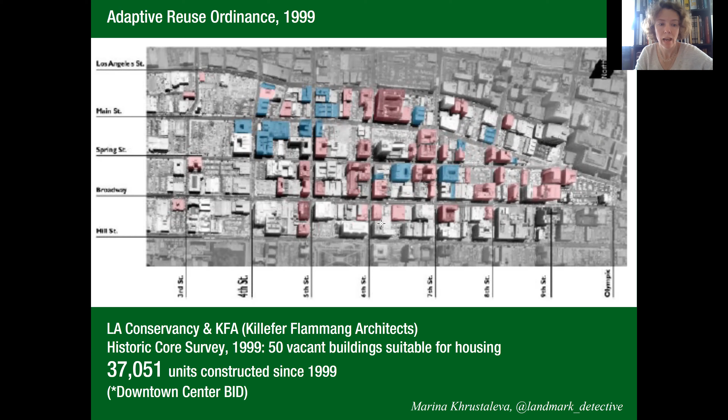In 2003, five other areas were added to downtown LA to be covered by the adaptive reuse ordinance: Chinatown, Lincoln Heights, certain parts of Hollywood, Wilshire Center and Koreatown, and some portions of the Central Avenue development area.

However, now we can see that some of them don't take on any new adaptive reuse projects at all. Some of them have switched their attention to new construction. In a minute, I'll try to explain why this is happening.

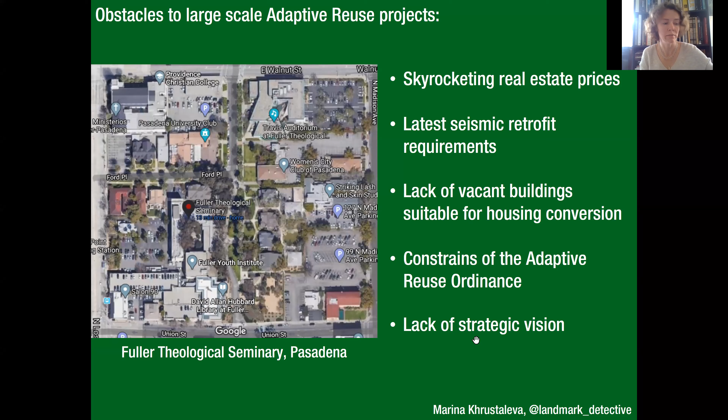But this is just an example that when there is something on a large scale, there are so many stakeholders who have to get to a common decision that sometimes it's just not an easy process. With that in mind, I want to invite Margarita Jerabek to start our first presentation on the Culver Studios project in Culver City.

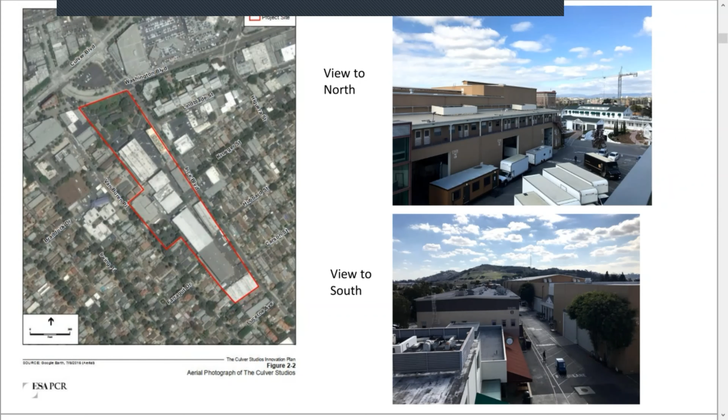So we did a chronology of the buildings built during this era. There are 4 buildings that remain, and the rest are gone. One of the 4 buildings has been relocated.

This is the DeMille era, Cecil DeMille and the early RKO studios, when the Culver Studios became part of the Big 8 motion picture studios, which I'll talk about in a minute. This is what it looked like in 1931. In particular, the glass stages are now being replaced by sound stages—sound stage 2, 3, 4, and building O. It looks like there are still 2 glass stages remaining, so we're starting to replace the glass stages with sound stages during this period.

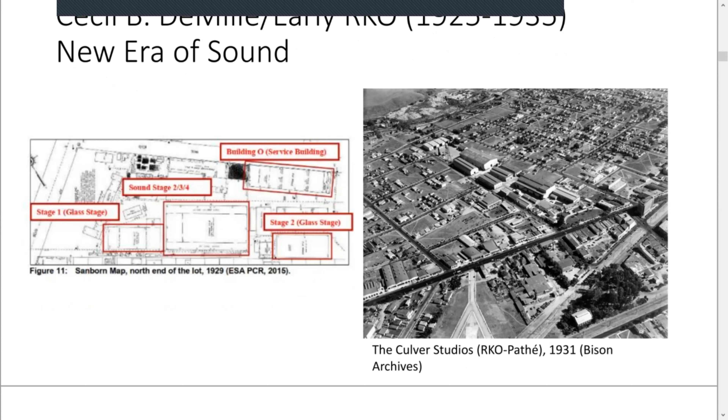This shows from the RKO era, 1925 to 1935, which buildings are extant. Most of the historic buildings preserved today were built during this era, and there are other buildings that have since been removed.

Then there's the Selznick era, 1935 to 1949. During this period there wasn't a lot of construction or site development compared to the earlier periods. This is when the big productions came to Culver Studios—Gone with the Wind, Citizen Kane, The Paradine Case. It was historically significant during this period, but pretty much the historic buildings that contribute to the history of the studio site today had already been built, with the exception of Soundstage 15 and 16, which was added down near the end of the lot.

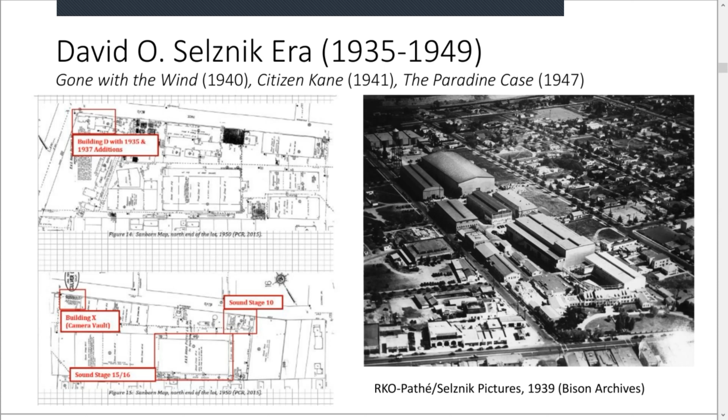And then there were additions to the mansion—this wing with building D—and a DeMille theater that was added during the DeMille period, right here alongside building D. So again, here you can see which buildings are extant from this period and which are no longer extant. A lot of site development happened over the years.

So the site was evaluated under the context of major motion picture studio, where we studied through comparison of the various major motion picture studios in LA and looking at Sanborn maps what buildings comprised a major motion picture studio, and identified 12 building types associated with the studio as a property type. Today, there are 5 of the 12 building types existing on the Culver Studios lot. The site is currently dominated by sound stages and the mansion building.

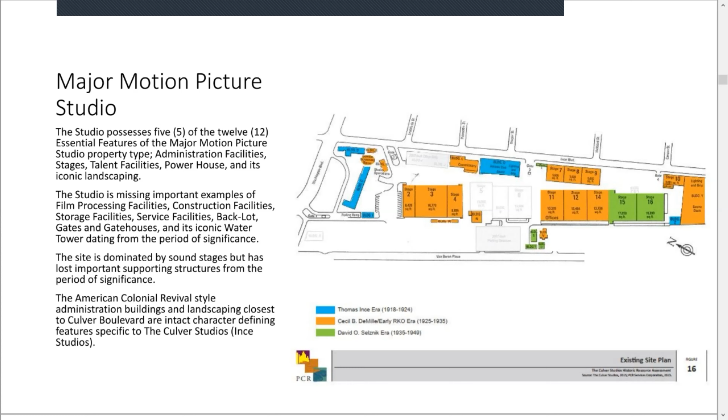The mansion building and associated ancillary structures are colonial revival in style, and there's an intact landscape there. But the other buildings that formerly filled out the site have been demolished and replaced over the years.

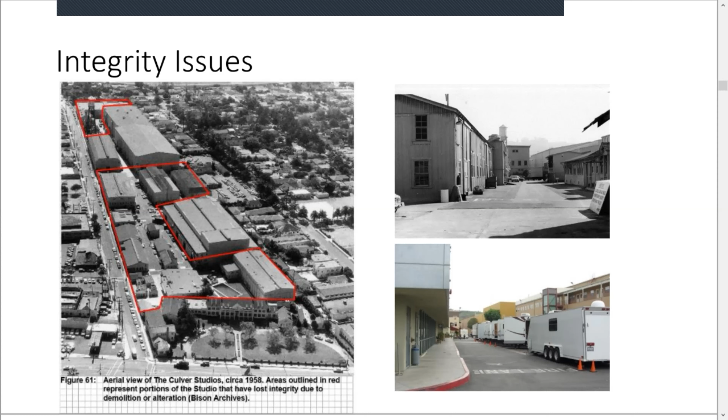So here there were obviously some integrity issues we identified on the site. These areas outlined in red are the areas where buildings from the period of significance have all been demolished or substantially altered and are no longer contributing. Above here is a shot of the studio lot during the period of significance, and below is a shot of the studio during the time of the survey.

So we conducted the historic assessment. We identified and evaluated the property under the major motion picture studio context, and also within the city of Culver City, the studio was found significant for the early development of the city, the early economic development of the city, and for the theme Heart of Screenland. In terms of the 5 building types, there are administration facilities, sound stages, talent facilities which are the bungalows, a power house, and landscaping and circulation.

The 40-acre back lot was sold off, unfortunately, and is no longer there. And these other building types are no longer on the site.

So it was identified eligible under criterion A1A, National Register Criterion A, California Register Criterion 1, for association with the Big 8 motion picture studios. It was eligible under criterion 2 for significance in the evolving film industry and economic development of the city. The period of significance is 1918 to 1956.

It's also eligible under criterion B, National Register Criterion B, and State Register Criterion 2 for its association with significant personages, Thomas Ince, Cecil DeMille, and David Selznick. It's also, unfortunately, found ineligible for architecture under C3 because of the lack of integrity as an example of the major motion picture studio, due to the lack of the necessary property types.

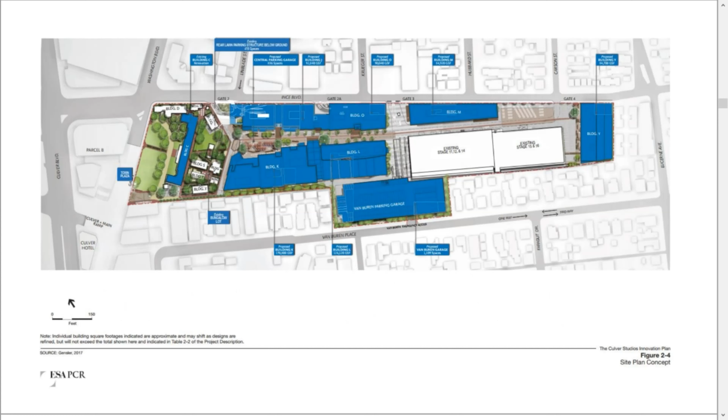Next slide. So here's a view of the innovation plan.

So mitigation measures, let's see, did I already show that or not? Go to the next slide. In terms of impacts and mitigation, significant unavoidable impact: first, the demolition of stages 2, 3, and 4, and relocation of bungalows. Less than significant with mitigation: potential impacts for accessibility, structural, and security upgrades to the historic buildings. So how do we handle this?

We recorded, salvaged, and are interpreting stages 2, 3, and 4, where we recorded the bungalows prior to relocation, and there's going to be an interpretive plaque at the new site. We prepared a relocation and rehabilitation plan for the bungalows' relocation, and conducted monitoring during the relocation. The mansion landscape is being rehabilitated in conformance with the standards, and plan reviews and monitoring are being conducted.

All of the tenant improvements and seismic, ADA, and security upgrades are being conducted in conformance with the standards. For the campus as a whole, there's a long-term preservation plan, not only short but long-term, for the future preservation of the studio, and also a state-of-the-art interpretive program.

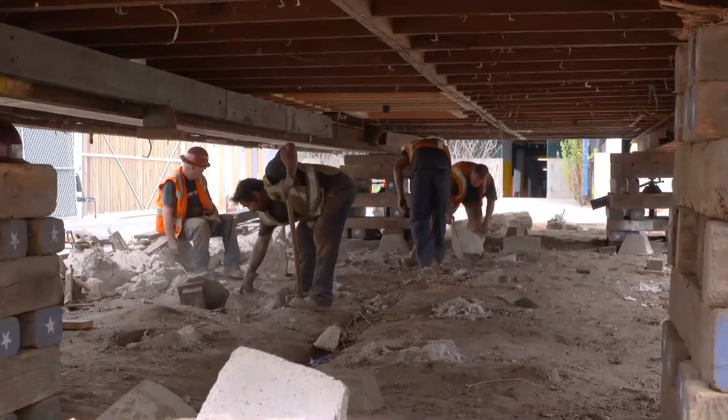So what we had to do is take off all of the structures that stick out of these buildings, because they're going to have to squeeze down this narrow little street. Porches had to come off, air conditioners came off of roofs, strip them down bare, cut out all the utilities, and there was a mess of pipes and conduits and all sorts of stuff going underneath these buildings.

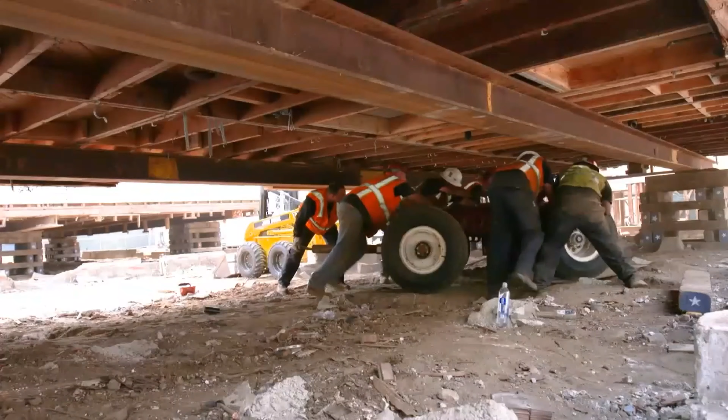Disconnect them, basically. They slide these giant steel beams underneath them, put dollies underneath the steel beams, and slowly pull them and roll them down the streets. It's pretty amazing, but they squeezed them through this narrow little area, and there were inches to go when they were doing it.

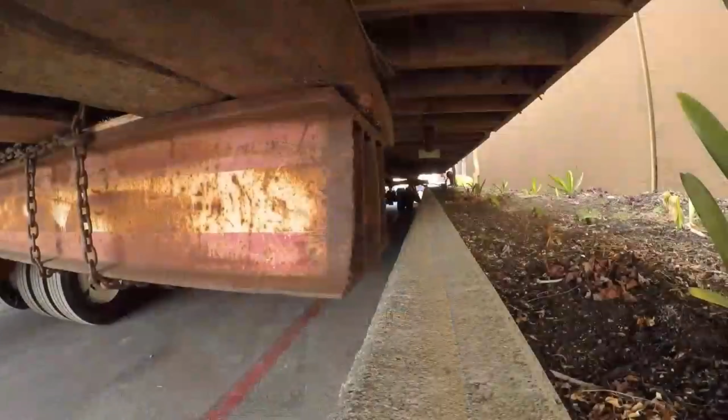At one point, they were kind of hitting, and like I said, there's no dry run for this, you just kind of go for it. They're bringing the building up, and it's not quite clearing a concrete planter bed, so they have to jack the building up a few more inches in one direction so they can clear it and squeeze it down. These guys are great.

These are the same guys that moved the space shuttle. They said they moved a 50-foot concrete building in Pasadena.

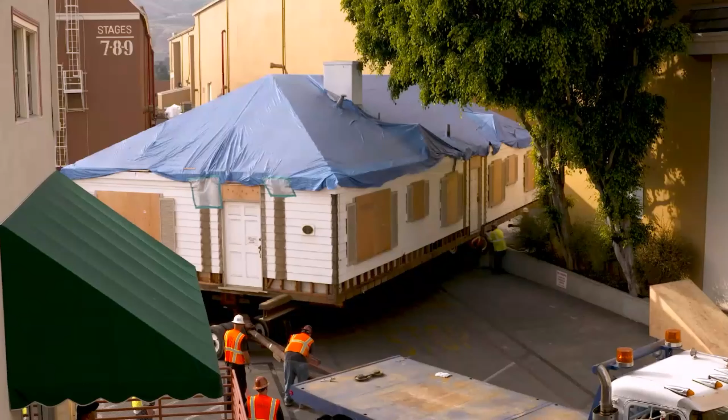So, to them, this was kind of child's play and pretty simple. These particular buildings have been associated with Culver Studios since the 20s and 30s, so their association is almost 100 years old. They're really important in maintaining the historic significance of Culver Studios.

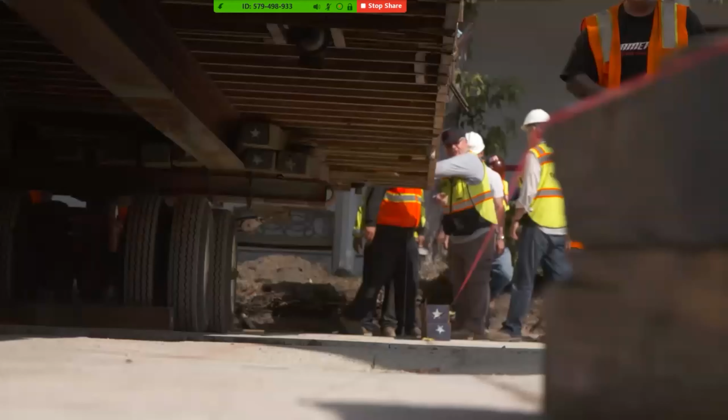We couldn't have picked a more difficult relocation project, because we're relocating the bungalows to the top of the parking structure. The weight of the bungalows combined with the rigging required to move them is too much for the parking structure. We have to be very precise and think everything through carefully. We can't just move them, build a new foundation, and hook the buildings up again. Drainage is an issue, everything is an issue. It's a very intricate project.

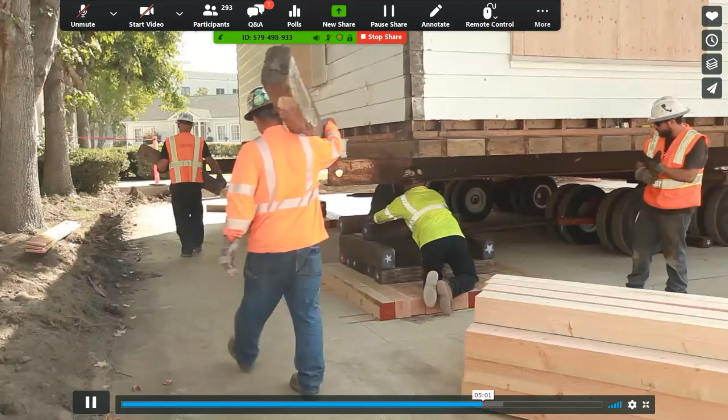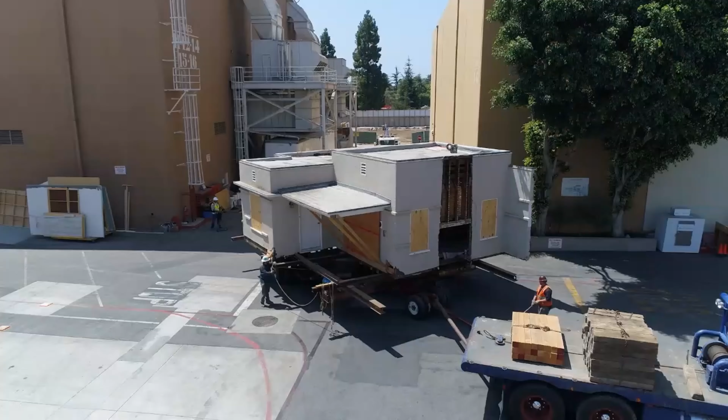There were a lot of unknowns. We had to get the right team in place to find out what they were and give us enough time to make this happen. We've got the best team we can, but no one here has ever done this in its entirety. Everybody has done a piece of it, but no one has ever put buildings on top of a parking structure before. We've hired a specialist crew that braced and secured the building to make sure that during the move it stays within its original parameters and doesn't shift around. We've removed elements from the building that would be problematic to travel with—a couple of things made the buildings too wide, so we had to remove them to fit through the access we had.

I really appreciate and respect the time and energy going into doing the job right and caring about the history, realizing it's a win-win situation for the studios and for the benefit of the public as well. We recognized when we bought it how unique the property was, both within the community and the city at large. We felt we needed to be a really good steward, and to do that it was important to preserve this as some form of content-driving facility. It's just such a cool property. At the end, it'll look great and look simple, but all the hard work that went into it is quite remarkable.

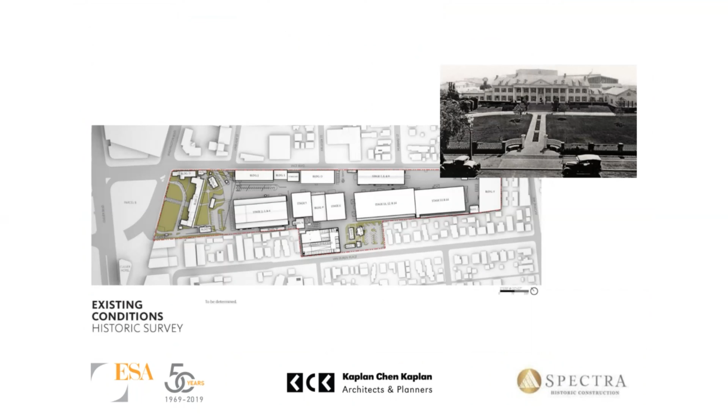And there you see circled is where the bungalows were relocated, as Margarita pointed out, the site plan. And of course, there it is. And just like you expect out of the entertainment industry, that green grass was misleading.

As soon as we started writing memos to the team about issues we'd been encountering, they informed us a lot. The site itself was part of a larger project, and there were activities going on all at the same time. It's an active studio lot.

The site turns out to be located over subterranean parking. There were issues about the soils. I'm advancing it without meaning to here. There were relocation issues, as the movie pointed out.

In the setting, we had to recreate a setting on an area where the landscape couldn't be as mature, but was starting over again. But we wanted to use the paths and paving.

The schedule is a big part of it, as they pointed out, because once Amazon wanted to occupy the site. So after one of the first tasks we did, sorry for skipping through all this, the use became extensive, much more activity.

There's huge mechanical and data that had to be included. The code, of course, was very important. Margarita pointed out the Secretary of Interior Standards, the State Historic Building Code we use.

There are all sorts of accessibility handrails off those bungalow steps, door heights, widths, hardware. The house had residential bathrooms that weren't handicap accessible, fire life safety, sprinklers.

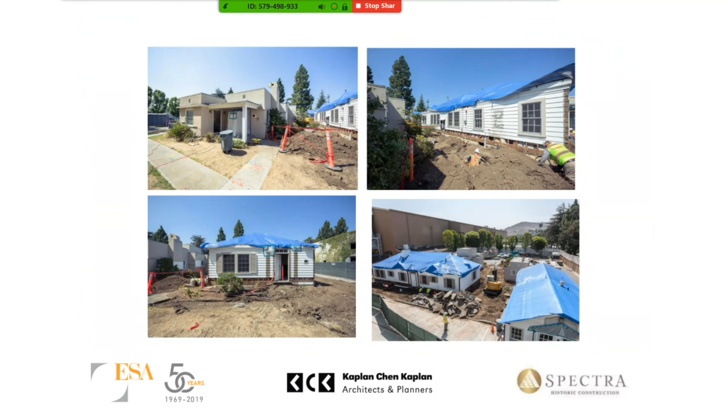They're mounted up. One was slab on grade, so it had to be lifted from above the slab. The other three were bungalows. They were reached underneath, so all their skirts had to be removed, all the lower finishes. You saw all the relocation issues.

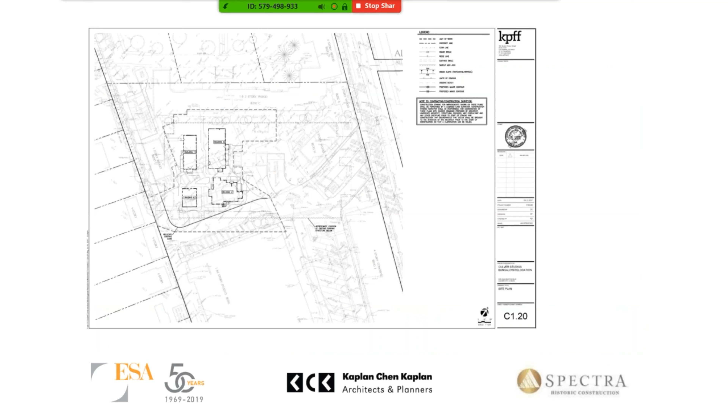When we got to the parking structure, they had to actually map out where all the structure was underneath. They had to shore the parking structure underneath. There's so much, just keep advancing. I don't seem to be controlling it here.

They're showing the scraping it off. That's showing the structural layouts and how we had to adjust for landscape and placement of structure to actually meet.

You want to go ahead? And so it's all mapped out as they moved in, and the trucks had to move away. There you see the shoring in the parking lot. Again, it was an active parking lot at the time. Go ahead.

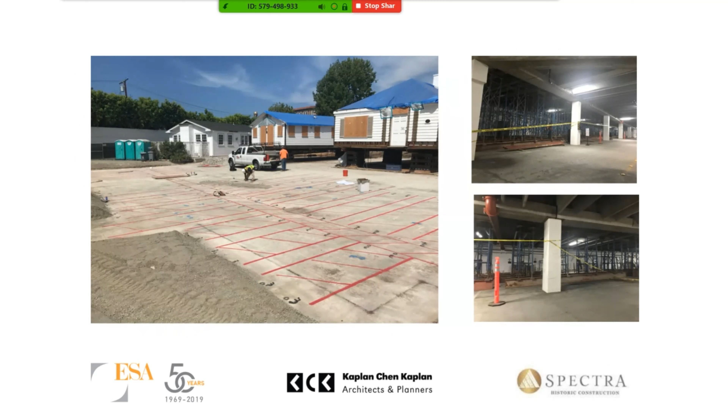This was the crucial point, is how to get it sited so that you kept the same number of steps. That was partly an ADA issue. One building was slab on grade, so that was, you had to get that set just exactly right.

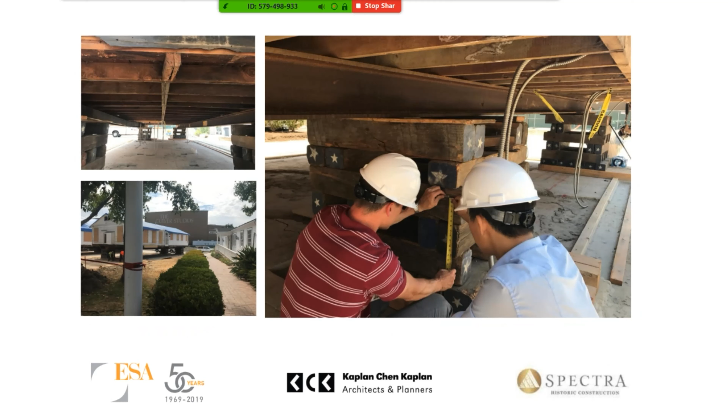And this was a key day. I had to record that moment. The steel, getting steel beams out from underneath. Here they are adjusting everything into place.

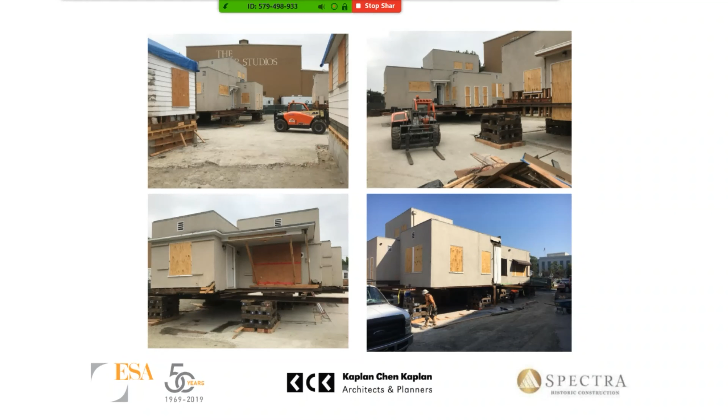We can advance that, and you see the precision. There's a pneumatic machine up there on the top right. You can see how they were readjusting.

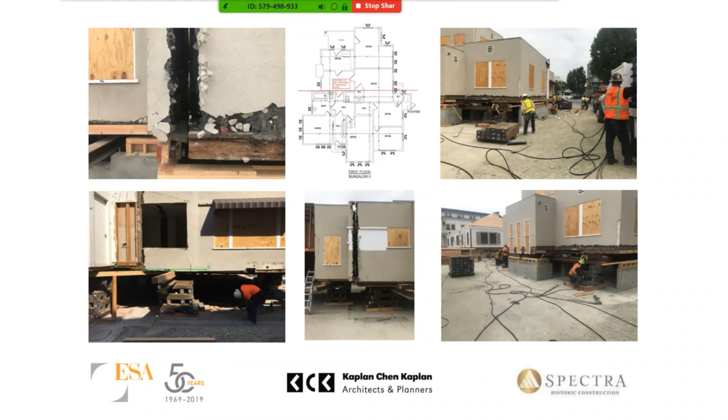As I tried to point out early on, the first task was to do elaborate, extensive as-builts and analysis and documentation of all the windows and openings for the project to maintain that.

Then you can see some of the impacts. It's kind of scary along the way. A lot of finishes get removed in order to make these kinds of things happen.

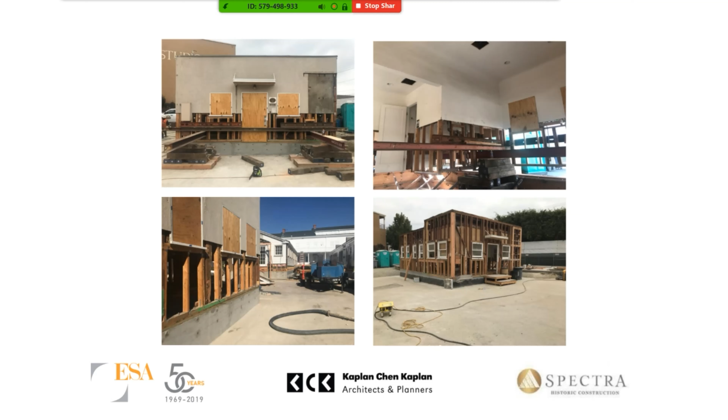And then in the end, some decisions were made because of the mix of finishes over the years and bad repairs, so we decided to reconstruct some of the stucco finishes completely. Those are some of the decisions that had to be made along the way as we evaluated in the field. And here shows all the skirts being put back.

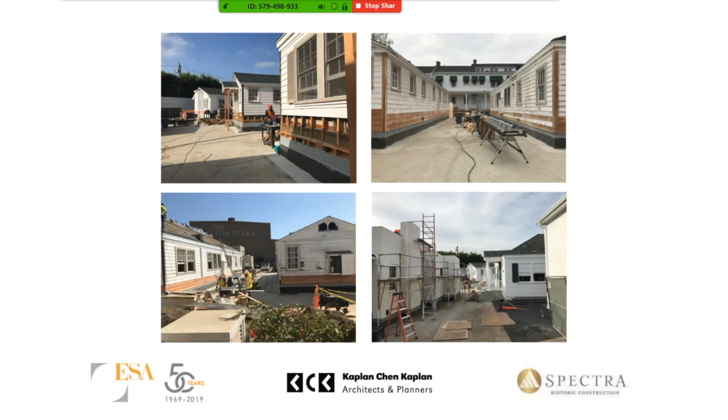Spectra was involved in all these projects, and that was a big part of having a cooperative team under a lot of pressure.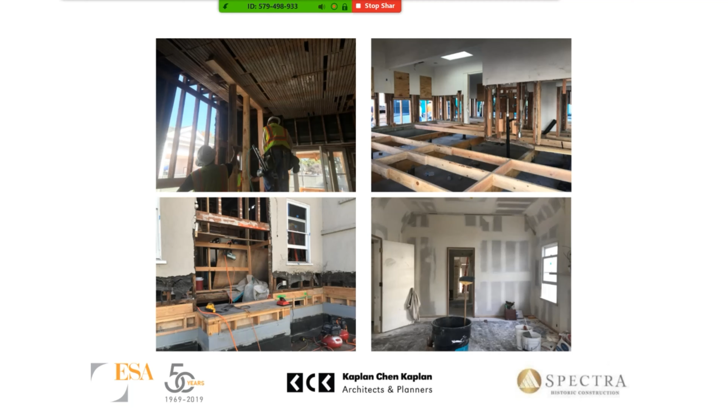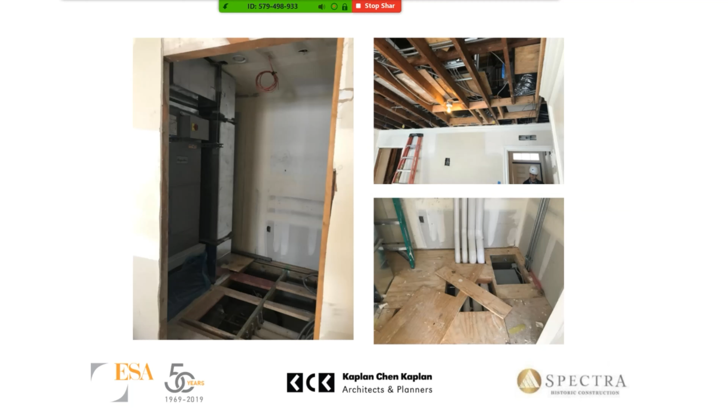We couldn't believe what mechanical systems they're putting into tiny bungalows in order to take care of now 15 or 20 people instead of 2 or 3. So that was something we had to figure out.

Here's all the mock-ups, the dash coating. We had 2 different dashes, heavy and medium, depending on the buildings, and that was really done well. It's a lot of work.

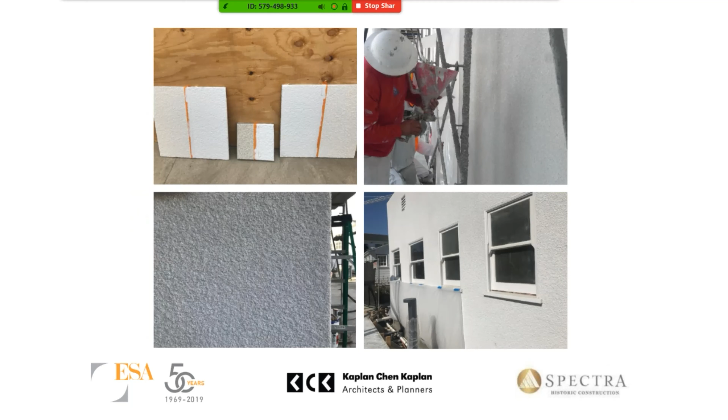The paving was really an important aspect, getting that older look of worn cement. We went through lots of moments of impatience, but in the end, the subcontractors come through for you.

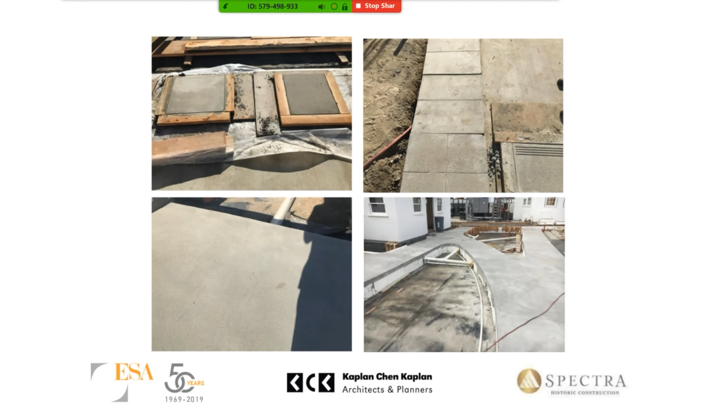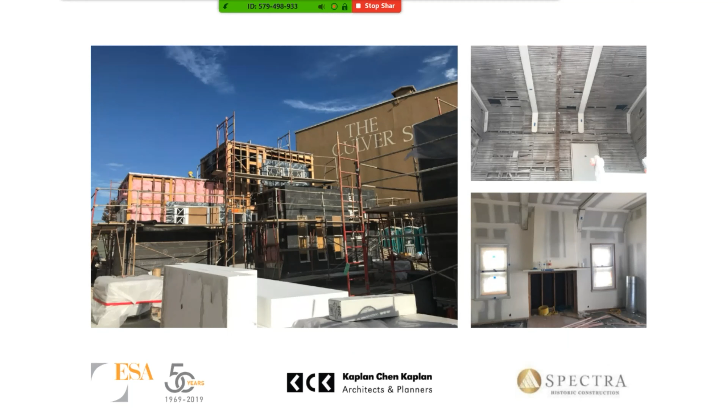This is just showing, you're insulating, we took out walls that had been inadvertently placed through the middle of rooms. There are a few other miscellaneous improvements we were able to keep our eye on, concealing more mechanical.

You see the interior finishes getting saved, the hardware. We had sprinkler systems for fire life safety, so the ceilings were heavily impacted.

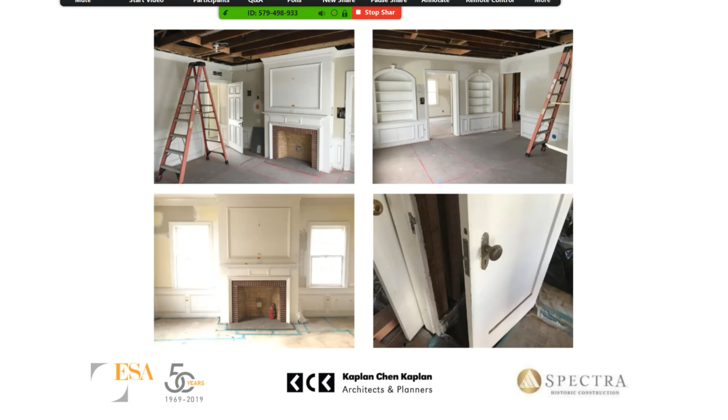If you want to keep advancing, it's fine. The windows, the drainage was a big issue. We kept gutters off, but they planned for future.

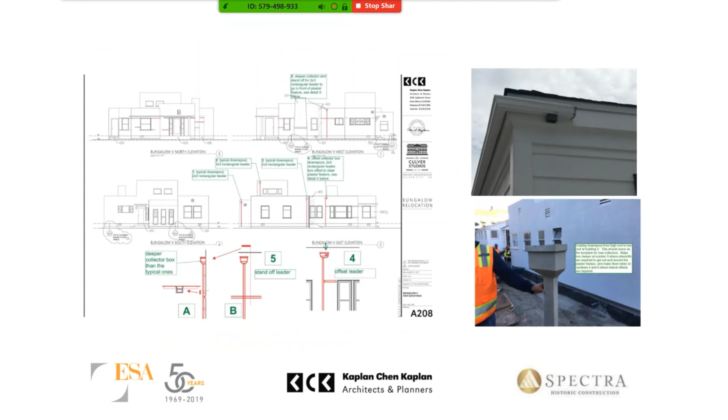The owners always have their own intents or concerns, and so they avoided putting a bunch of the gutters on, but they asked for the right drainage in case they needed it later.

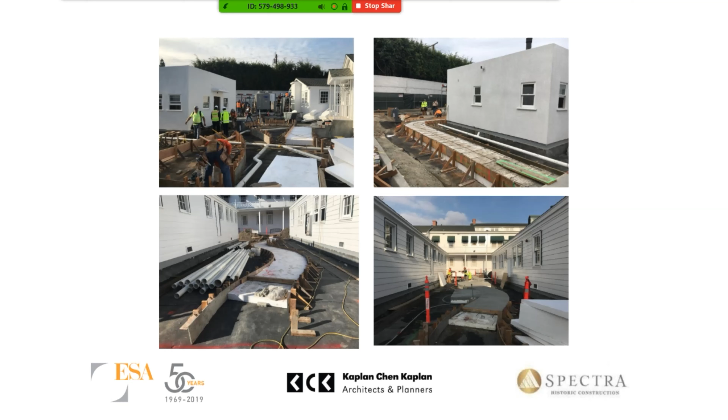There's a lot of foam in there so that we brought the grade up. At the same time we could only have 8 to 12 inches of dirt based on the dirt specifications that provide weight. So it's just incredible all the small issues on this scale that come up.

Then this is putting it all together. That's going to be the center space eventually.

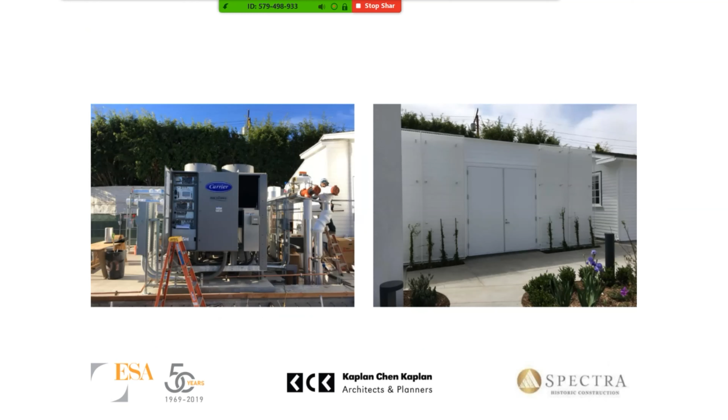Here we are finishing up. The fence was the original piece of the original fencing were retained and the rest replicated.

And then the final grouping and product.

It's just an incredible team, the proactive contractors and the owners who had good intentions and really wanted to do good things and had their own concerns. Somehow it all came together. So I think that's it.

And of course the contractors, we owe the best. I have to mention Tasmania as well, the general contractor, and then Spectra, who provided all the labor for all the historic preservation work.

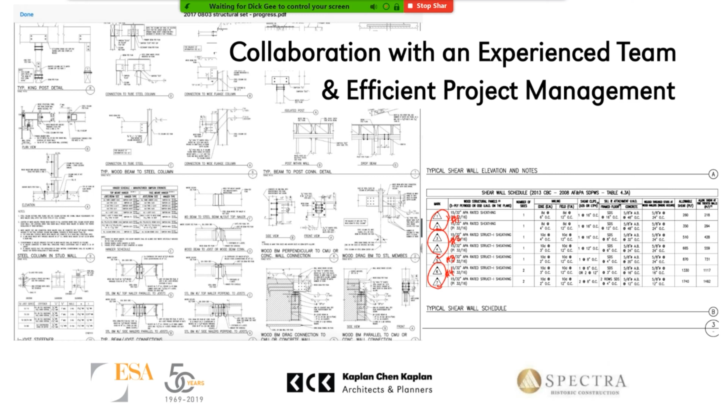You'll see some of these pictures showing that one of the things it really takes is an experienced team that collaborates quickly and efficiently.

And so this is an example of - we were given structural drawings, and basically if you let it run its course, you start construction, you identify issues, and you have to make changes. So from day one, the superintendent and myself took the structural drawings, walked through the buildings, and we identified all of the constructability and preservation issues while the design was fresh from the first day.

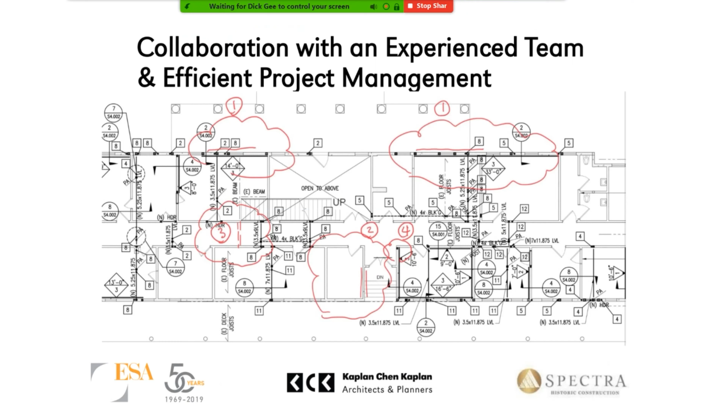Basically, shear transfer has to go through the whole building. And as you know, historic buildings don't exactly line up correctly, and it's impossible to get everything to work. So we were able to go through this process. We started with the initial design. We discovered all the issues, constructability and preservation.

I realized that a lot of the double wall shear walls were removing more fabric than we really wanted. So I worked with a structural engineer. We strategically one-sided shear walls. There were different planes happening, so we made them shear board, which is a metal shear wall versus plywood, so you don't have different changes in plane and historic materials. So we quickly identified and walked through and proposed these solutions.

What was great was that by the time they circulated it and even got it to other members of the team, like Margarita, looking at the preservation issues, we had already identified preservation issues, and the engineer had redesigned about 90% of it before it even was routed over to them. So this whole process of getting the design, discovering the issues, proposing solutions, and redesigning all happened within a 2-week period. They were able to get new structural drawings back within that 2-week period.

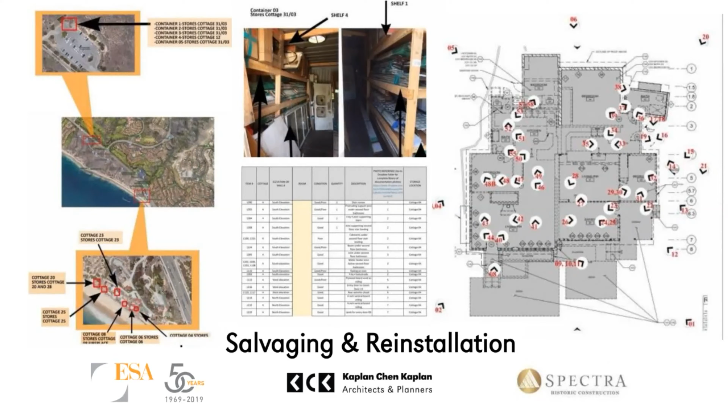So you have to have a team that's capable of carefully removing thousands of pieces of historic material, cataloging them, storing them in containers, and putting them back and reinstalling them. In this next slide, you see that in Culver Studios, we had over 3,000 pieces of historic removal that we salvaged and removed.

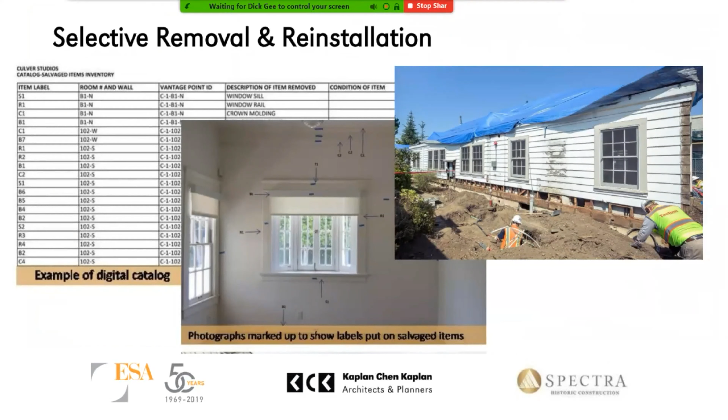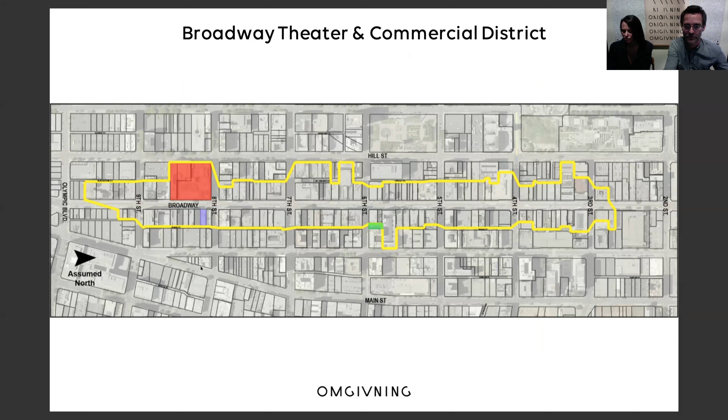So this building was a really important addition to Los Angeles, and over the course of the 5 years we've been working on the project, we've heard a lot of interesting stories from native Angelenos about their experiences in the building, as children growing up and visiting, which is fun to be a part of.

So just a fun fact about the history of the building: you'll often hear that it had the first escalators, or as they were referred to at the time, moving stairways, on the West Coast. That drew in a lot of people just to experience that.

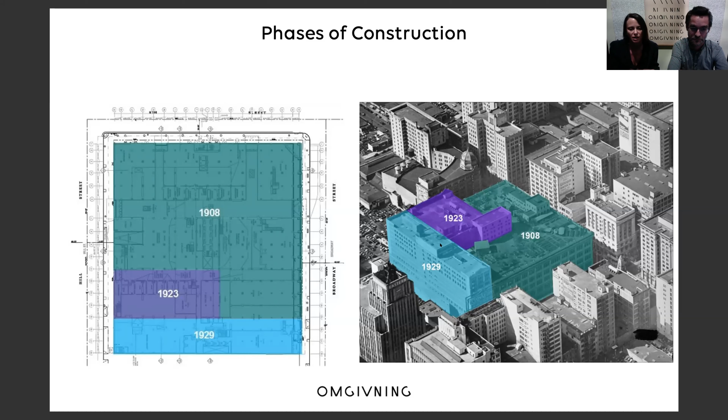Something else to give a good idea of the scale of the project: we have multiple phases of construction kicking off over 100 years ago. The photograph Peter was showing was only this dark green portion in 1908, and that was large enough in and of itself. Then we had these other additions that came within about a 20-year window, which was quite a considerable pace for such a large-scale project, representing the growth of that building and its use.

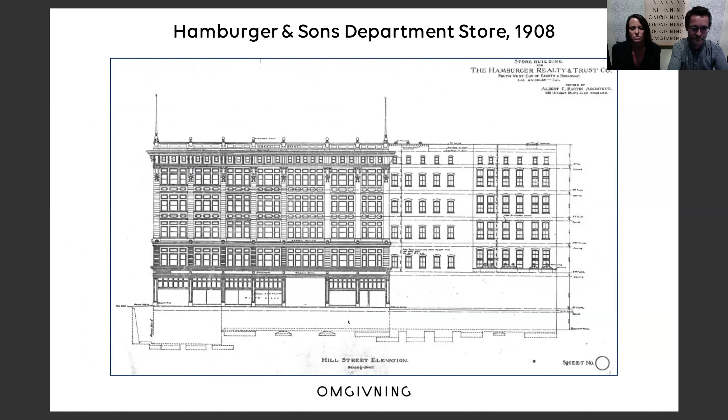Here's an image of one of the historic drawings of the building. This gives you an idea of that first building, the complication and mass of it, and then you can imagine coming in with these other buildings connected to it, and structurally how complicated that was at that time.

Chiropodist - apparently that's what they called a foot doctor at the time. There was also a rooftop garden, auditorium, a theater where you might rest and watch a vaudeville show or one-reel motion picture. They had very modern soda water fountains for the time, and also a temporary location for the library, so the uses within this space are vast.

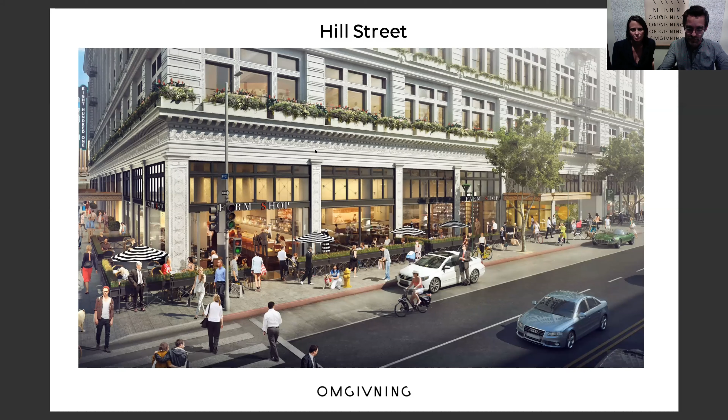Here's a shot of the imagined ground floor storefront. Really, the majority of what you're looking at here has already been restored by Spectra, and we'll get into some of those detailed photographs. Our work on this exterior will be focused primarily on the storefront, converting from what was a series of display windows in the original incarnation to something we envision as a bit more porous, really linking the sidewalk uses to interior uses.

Here's a first floor plan, again continuing that public sidewalk circulation element into the building, maintaining the historic display aisles as they traverse the building. That was a key component of the historic approval process. This project did seek historic tax credits, and we can get into some more detail on that.

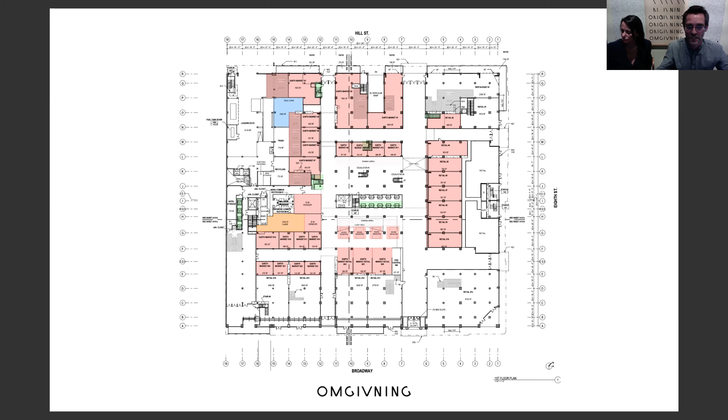The green elements are the primary elevator cores, which we've maintained. In the lower left-hand corner, you see this hotel lobby element with its unique and dedicated elevators associated with hotel use. Upper left-hand corner is loading dock and service functions.

Here's a typical office floor plan. We managed to reuse all of the existing stairs. We did have to add one new stairway, but the exiting system was nicely distributed, so it worked to meet the majority of the current exiting demands per the current code.

So we looked at a typical office floor and imagined it from a range of potential tenant configurations. The project is a core and shell speculative creative office project, so our work is really limited to elevators, stairs, exterior shell, and rooftop components.

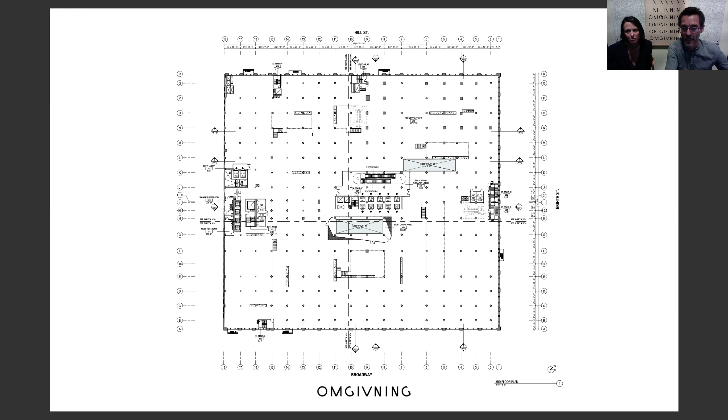On this lower roof, we've got a series of penthouses, some existing, some new, that would be various restaurant and bar uses. There's also a grove area here, a viewing area off to the north. There are various seating and dining areas throughout, and then on this northeast corner of the building is slated a community park, and a stage area where you'd be able to have different live shows and things of that nature. And then there's a very sizable pool over at this portion of the roof that would be more of a community pool.

As we get to the upper roof, you'll see there's another pool that would service the hotel. But the idea of this pool is that it would be more of a community use. You'll notice in the center here there's an entry that takes you to the 6th floor, which is slated as a social club, a spa-type amenity that could be shared for public use and also for the hotel as well.

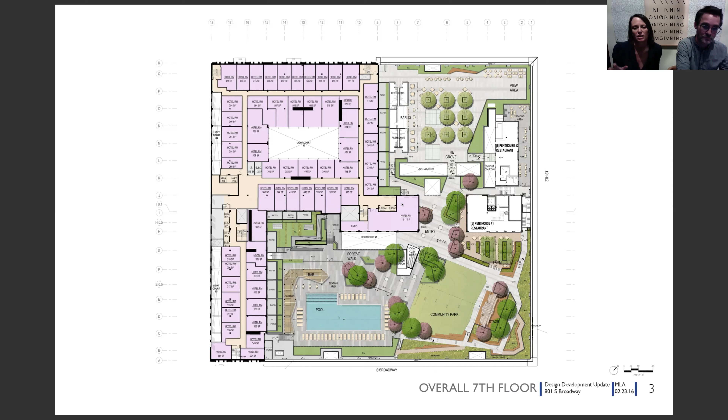Moving up to the higher roof, as mentioned, there's another pool that would service the hotel, and then more penthouses—these are both new penthouses that function as bar restaurants. Then tucked in the furthest corner is some back of house, and also the mechanical.

Peter's going to talk a little more about the challenges of getting all the mechanical systems in this building, but being that we were trying to utilize the rooftop for so much public use, the mechanical had to get squeezed into that furthest corner.

You'll notice some of these penthouses on the lower portion of the roof have green roofs, just because if you're enjoying yourself up on the 10th floor, you don't want to be looking down at just rooftop and mechanical equipment. So every inch of this roof is valuable in some way to the project, and it posed a lot of challenges in how all those spaces would be experienced and what you're viewing from each space.

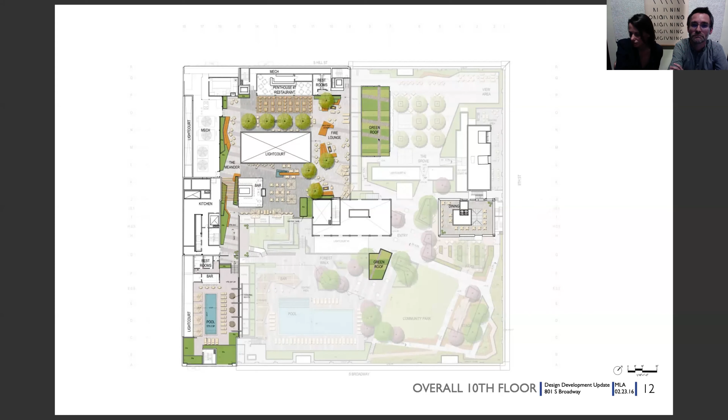Yeah, with the typical core and shell creative office project, we can focus on stairs, elevators, exterior shell - your common amenity spaces are relatively minimal. This project was an exception to that, and here at the 7th floor, the 10th floor, and the ground floor all had extensive common spaces that had to be coordinated, permitted, and included in our typical core and shell.

I'm gonna try to zip through this maybe as much as possible. John, feel free to cut me off - I know we want to try to keep some room for questions at the end. Here's back to the first floor.

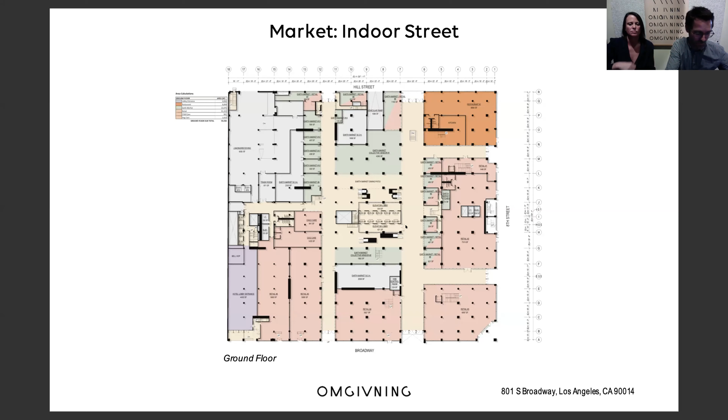An additional challenge here, due to the deep floor plate, over 300 feet by 300 feet, you get a sense of the limited natural light, which with a department store is not a problem at all. It's a very insular use - you want to focus on the product that you're purchasing. In the case of our needs, we wanted to create a light-filled office environment.

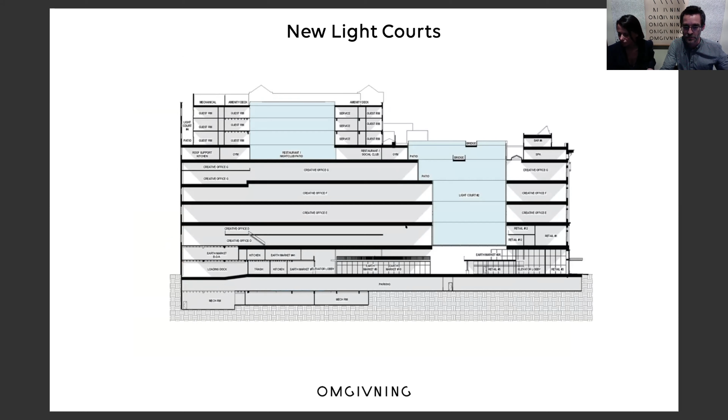So we opted, in order to try to solve that problem, we removed 55,000 square feet of floor plate in the form of 3 primary light courts and a handful of smaller skylights and light courts, to really introduce as much natural light deep into those floor plates and into those lower floors as possible. Here you see a cross section of one of those light courts.

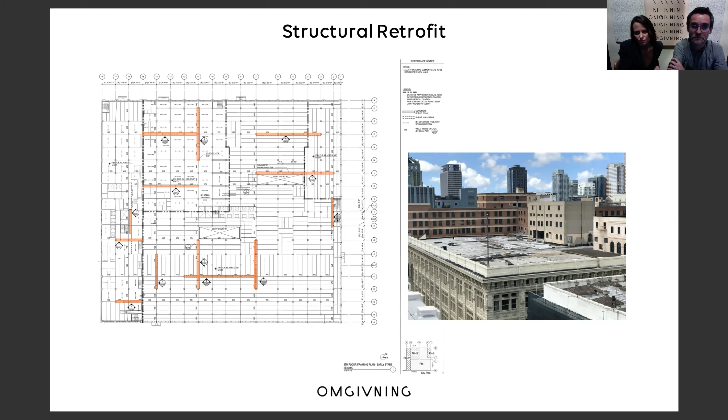And the seismic upgrade was done in advance of all the other work. So here you've got all of the rebar coming through the roof that is intended to then later tie into all of what's happening up on the roof with the new pools and penthouses and things of that nature.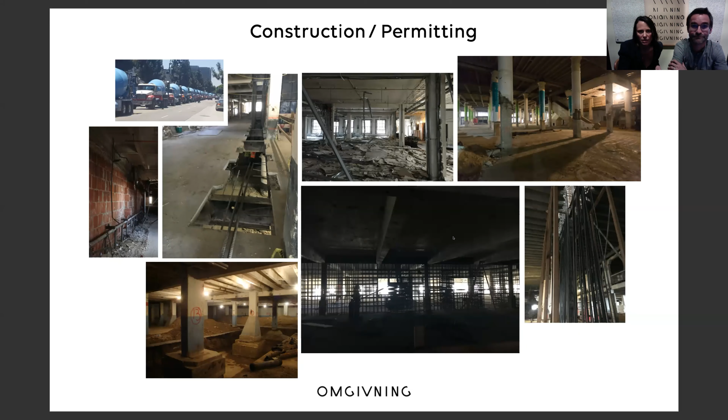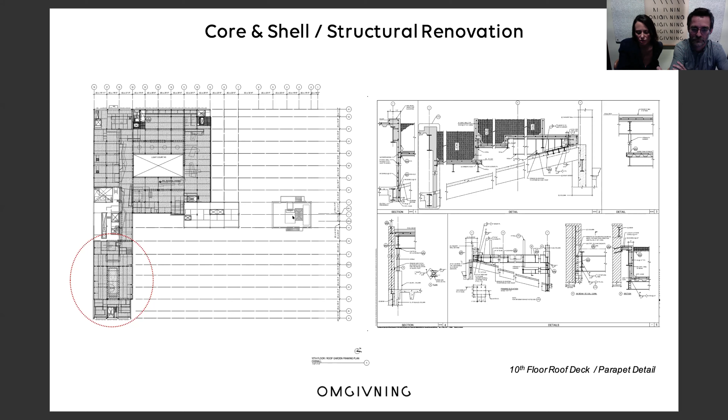So the coordination for all of those uses on the roof is very complicated. Part of that is the massive nature of it, but also dealing with these existing structures, and having to exit one historic penthouse and come out onto a new roof use, and coordinating those new structures and the levels and access. I think in total we've got new roof slabs, probably 20 plus at all different levels. So that was a massive amount of structural coordination.

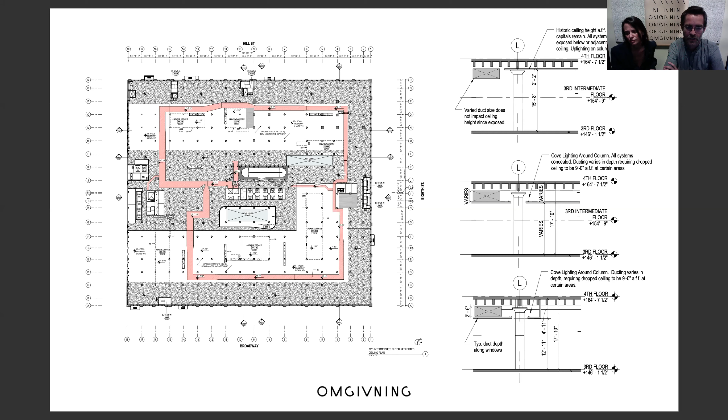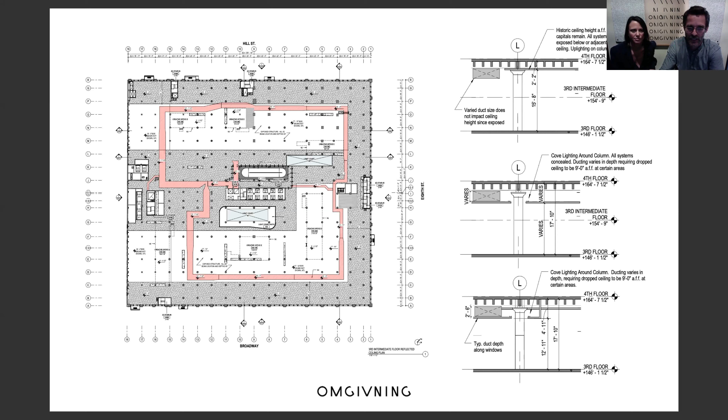We were able to maintain hard lid ceilings around the perimeter of the building and within the central core. In the center area, the ceilings were removed to provide room for the ducting. Due to historic constraints, we didn't want to introduce any new louvers to the perimeter of the building or tarnish any of the terracotta. So all of the air coming in and exhausting the building had to come through the rooftop area, which was a significant challenge in camouflaging all of those mechanical systems.

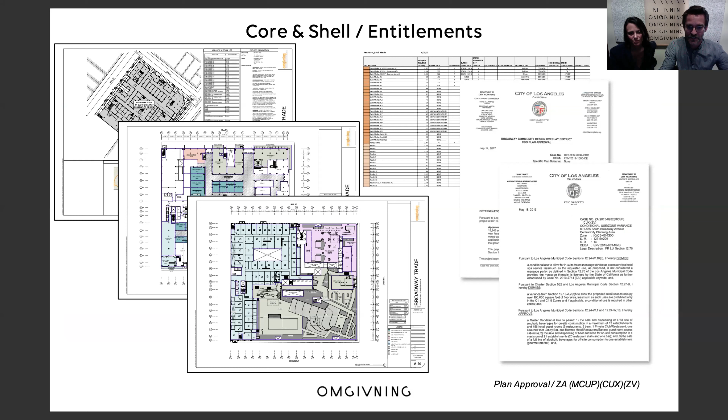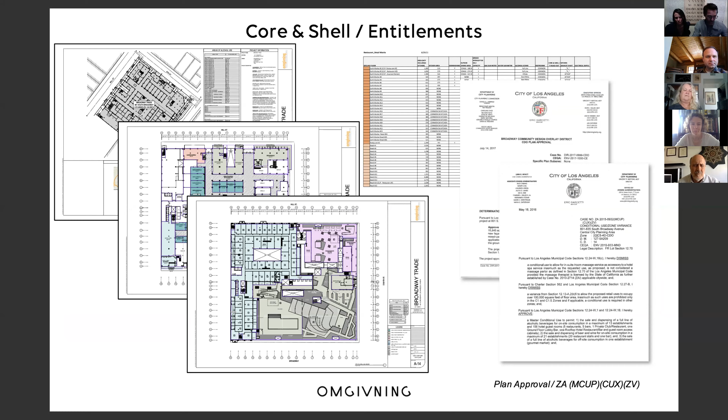Yeah, sounds great. This slide just touches on the range of permitting challenges: 16 building permits, 23 requests for modifications using the State Historic Building Code. It took the team 42 months for all approvals, 26 consultants on the team. As I mentioned earlier, Spectra led the restoration efforts.

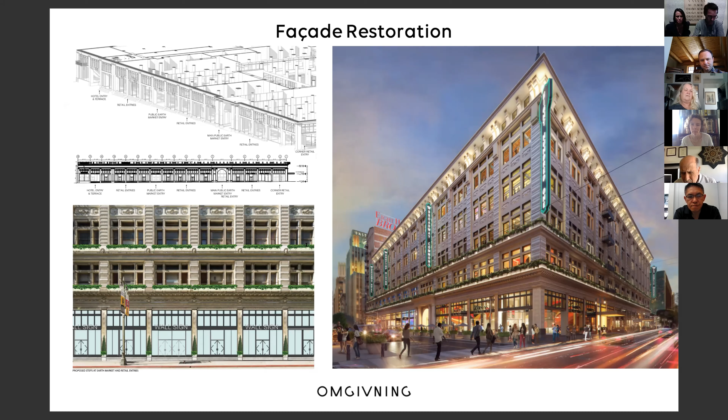Which are complete. If you haven't seen it, go check it out. Terracotta on all the primary facades, brick on secondary facades, beautiful wood double hung windows, all restored, and some replaced when the damage was beyond restoration. Also steel window restoration work also done.

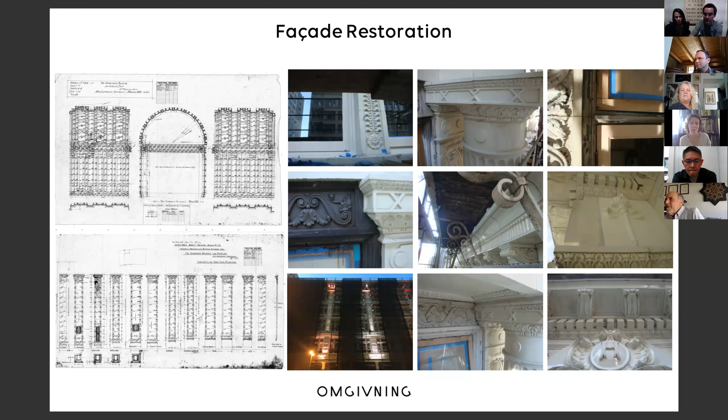Here on the left of the screen, you see the original shop drawings from Gladding McBean. Spectra was able to track those down. The company is still in operation, and they had this phenomenal set of drawings describing each and every terracotta block. You'll see that arched entry on the upper left-hand portion of the screen. We used that to try to recreate the original entry, which has been removed. On the right, you see some of the detailed work of the terracotta. Walking that scaffolding and seeing those pieces in close up was really a highlight for many of us, to see that level of detail. It's truly remarkable and really beautiful.

When we move into the interior of the building, there's really a pretty limited amount of historic fabric remaining in the building, limited to the elevator core at the center of the building, some of the escalators. You see some of this soffit work, which actually came in the 30s, but it was still considered part of the period of significance. So all of these elements, including the marble floor, will all be restored and incorporated into office lobby components.

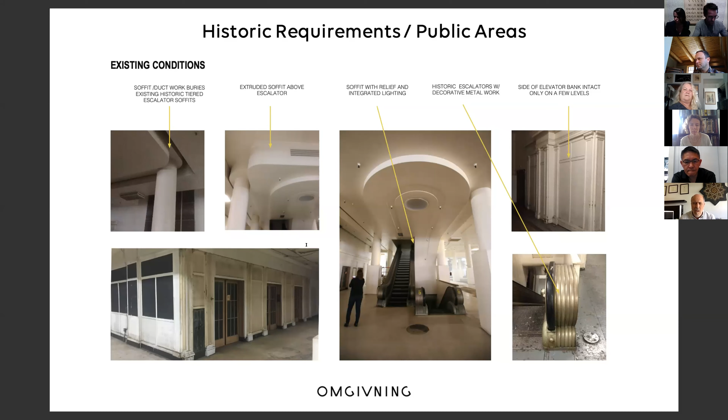And this is our last slide. This is kind of our latest efforts. We're in the process of describing the tenant criteria package. Again, because it's a speculative project, the work described in our permit doesn't describe all of the work that the tenants will be doing. So we've created a 40-page document that lays out the groundwork for the rules that they'll need to follow in order to maintain all the historic tax credits, including restoration of columns, column capitals where damaged.

But all the perimeter window casing work has already been done by Spectra. We've also defined a series of rules for how interior partitions, when tenants introduce new partitions, new conference rooms, new enclosed offices, how all those new elements will be built in a way that's secondary to the historic fabric and respects all of that historic fabric as much as possible. And that's the status of the project.

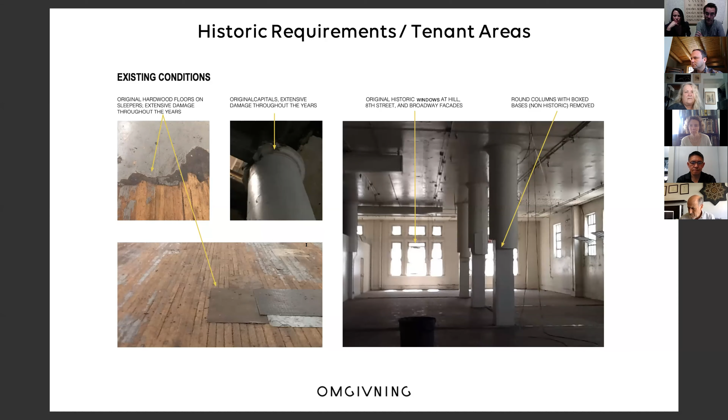But I'll start with the first question, which is referring to the Culver Studios project: was this a certified rehab tax credit project?

Oh, no, it was not. Okay, that's a great quick answer.

So we can identify that as live answered. There are a number of questions that came into the Q&A box. I'll start with the first one. This is interesting because it flips the usual direction - usually I get asked how adaptive reuse ordinances help. But this person is asking what are the current constraints to adaptive reuse that are hindered by adaptive reuse ordinances, since most cities are embracing and encouraging adaptive reuse. Is there a hindrance or reason you shouldn't want an adaptive reuse ordinance?

Well, this question appeared while I was talking, and I mentioned there are certain constraints of this ordinance. What I meant is you can take more or less any building with any history, but under the adaptive reuse ordinance, you can get incentives only if you convert it into two types of new uses - residential units or a hotel. You cannot do anything else. So this is the constraint. You can do anything else, but in that case, you are not receiving any incentives or any streamlining of the process. But I believe our presenters can have something to add to that.